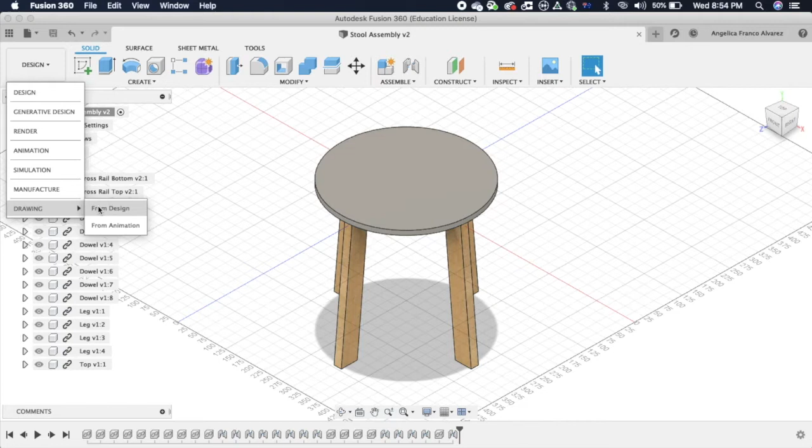So now we're going to generate the orthographic drawing. To do this, we're going to click here on this button that says design. If we click on that, it gives me these different options, and we're going to select the last option, which is drawing from this design.

We're going to do full assembly, and everything else is correct as it is. We're going to click OK. Once we click OK, it generates another empty document, and it will take a little while.

So if it takes a few seconds or up to a minute, don't worry about it. Sometimes this takes a lot of power from your computer. So if you have a lot of applications open when you're working in Fusion, most likely it will be very slow and sluggish. I would recommend to quit all the applications you're using, especially apps like Spotify or social media, and just leave Fusion open so it can take advantage of your computer's full power.

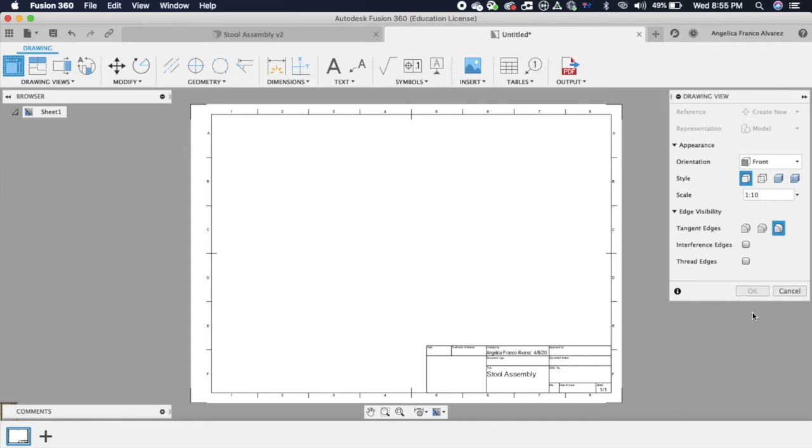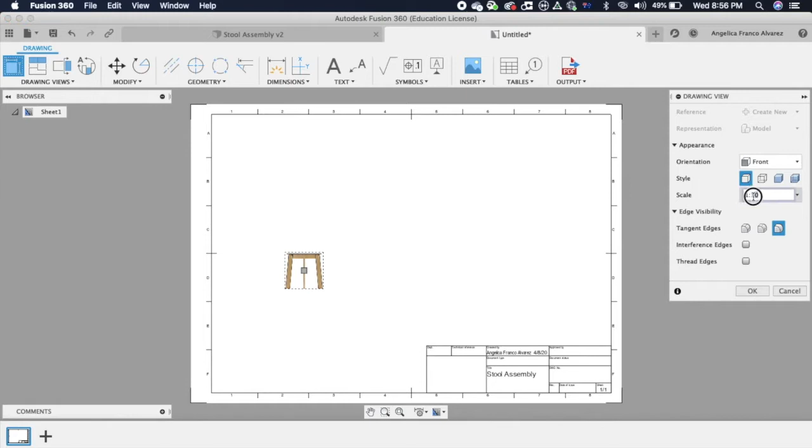So now it has generated the drawing sheet. If we hover inside the drawing sheet, you will see that it has created a little drawing, and that's the base view. So we're going to click on it, and on the right hand side there is this drawing view window, and we can select the scale. That is pretty small. You can explore 1/8, and it's a bit bigger, 1/6. Yeah, I like that size. Then we're going to hit OK.

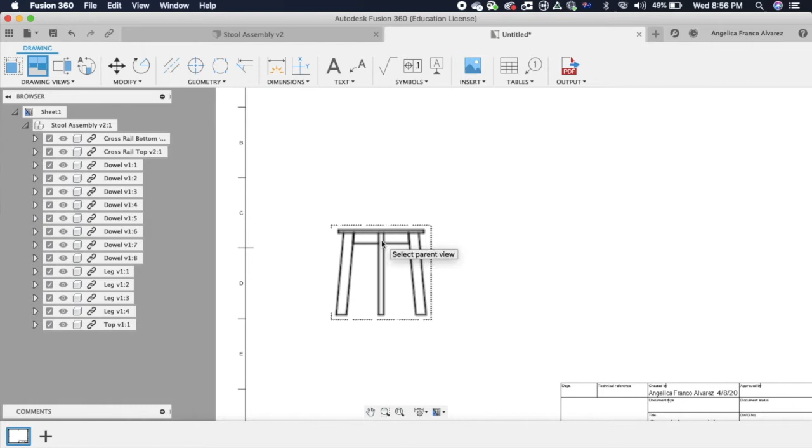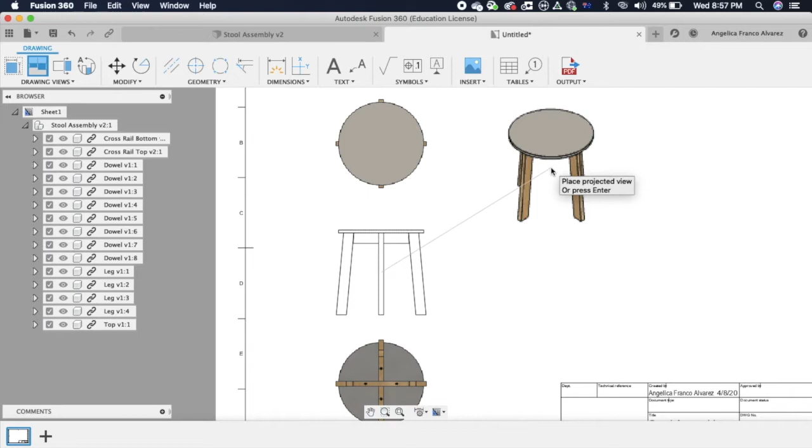Then we're going to do the projected views. Over here there is a shortcut for the projected views, and then we click in the parent view, and then drag out the other views. Click, that generates that view, drag down and click, that generates this other view. I'm not going to place the side view because it's exactly the same as the front view. I'm just going to do isometric and this other isometric from the bottom view, and then escape.

So now I have placed all these drawings. I'm just going to kind of organize a little bit my drawings.

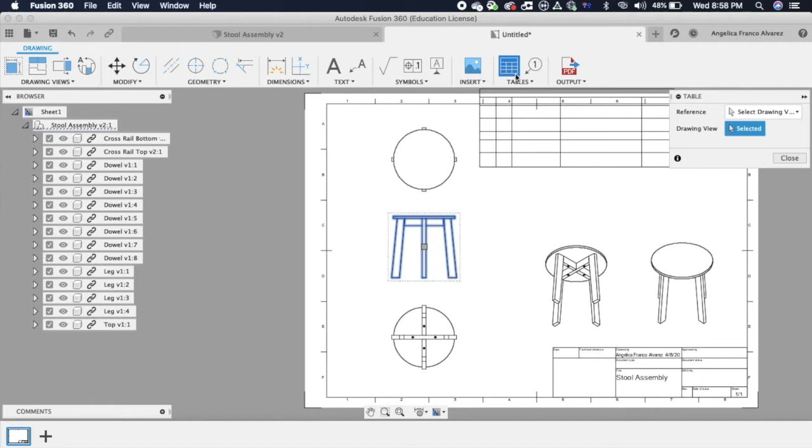Now we need to drop in our bill of materials. This generates a parts list. So if we click on the table, it will automatically generate a parts list. If we pan around, we can find a space and attach it. I like attaching it to this corner. It's a bit more organized, but you can put it down here if you want to, or on the other side, but usually we just put it on this corner.

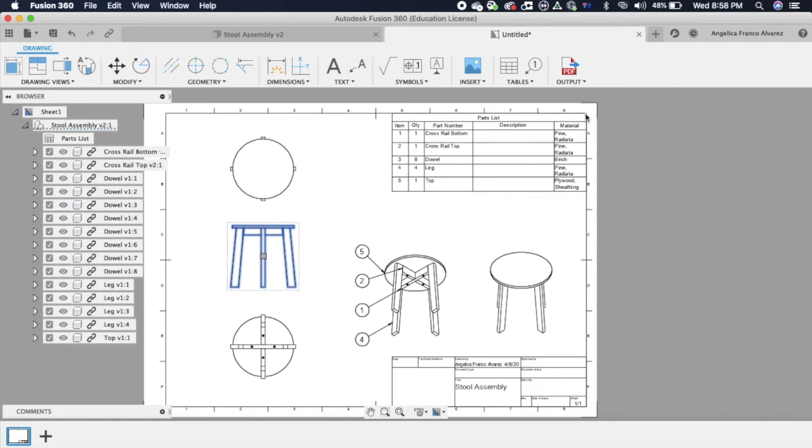You will see that there's text that is wrapping around because the name of the material is quite long, and we can adjust that by clicking on the table and then clicking on these gray boxes, and those gray boxes allow me to move around the width of each column. So that is pretty good now. It's not wrapping, and the table looks more organized. I'm going to just get back there a little bit.

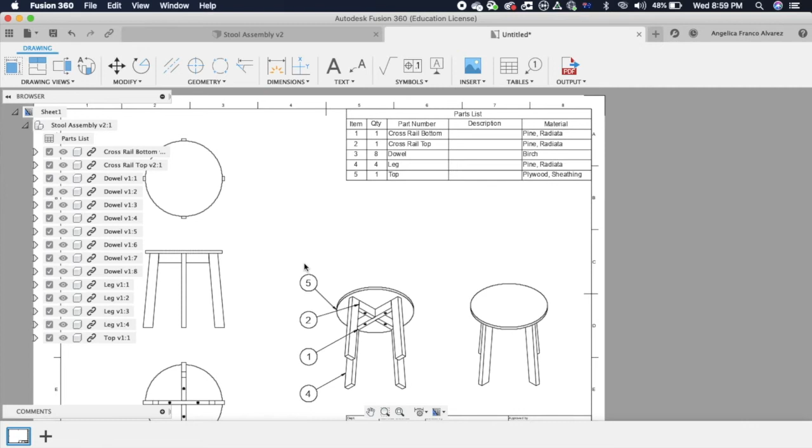There you go. When you generate a table, there is a bunch of little bubbles that are generated pointing out the item. So number 1, your cross rail at the bottom, that's pointing it there. Number 2, 5, 4, and number 3 are the dowels, but you can't see the dowels here because it's hidden.

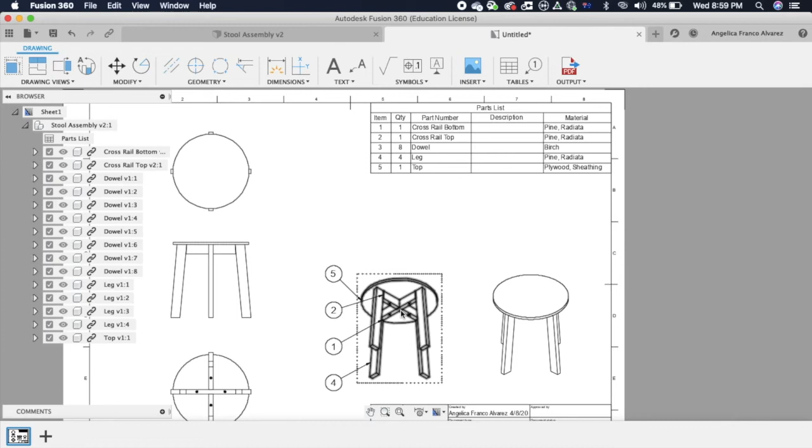So in order to be able to see the dowels, you can double click on the drawing, and then there is shaded with hidden edges. That allows you to see all the internal components. You can close that, and you can do the same for this one here, shaded with hidden edges. That shows you the material color and the hidden edges of the design.

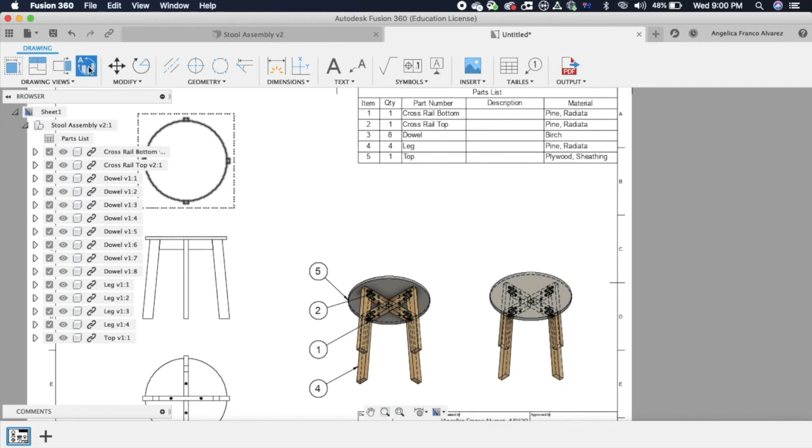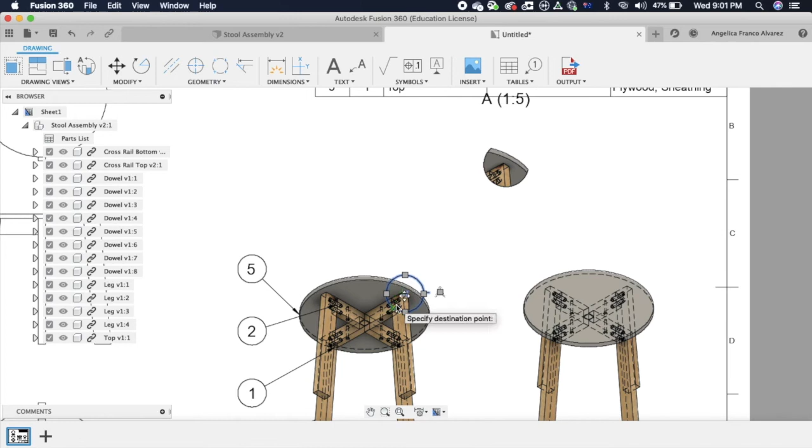If we want to, we can create detail views. There is the shortcut for the detail view here. We click on that and we can bring it in here. So I'm going to select this as my parent view, and then I'm going to click there, click again, and it generates a detail view of that area. I can adjust the area by closing in into a section and moving the center reference of the image. And I can increase also the size of the detail view.

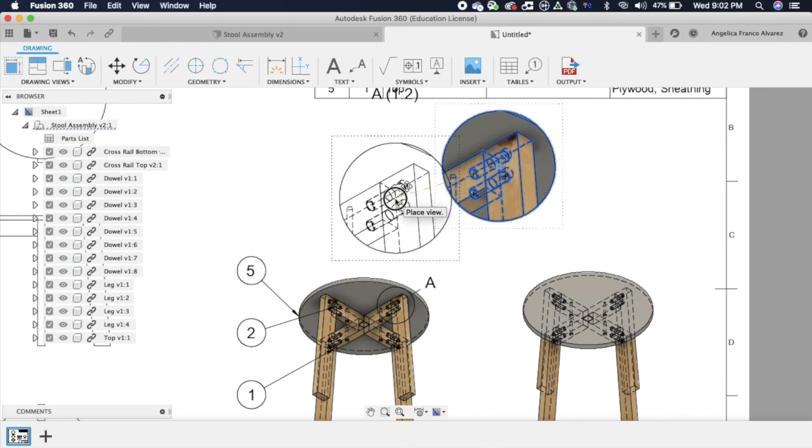I can also reposition the letter. Now if I double click on the appearance of this bubble, I can scale it, and I can scale it further. I can say 1 to 2, so it's a bit bigger, and I can explain better what's happening in there. That allows me to explain and show better the components that I have in there. You can see that the tag for this is a bit far ahead, so I can bring it down by clicking on it, clicking the middle point, and then dragging it down. Once I'm happy with the position, click again.

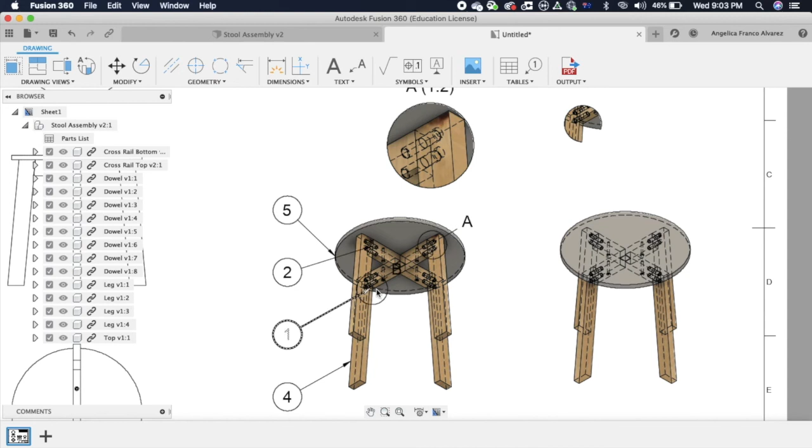I can also do another detail view of the perforations with the countersunk. So I'm going to go back to detail view. I'm going to select this side here and then press OK, and then now I can come in and edit. So I'm just going to bring this in, and I'm going to just move it to where the perforation is. Yep, so it's better visibility.

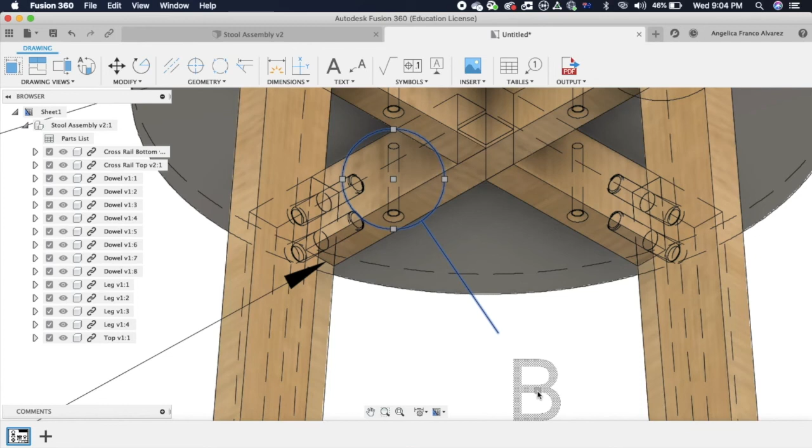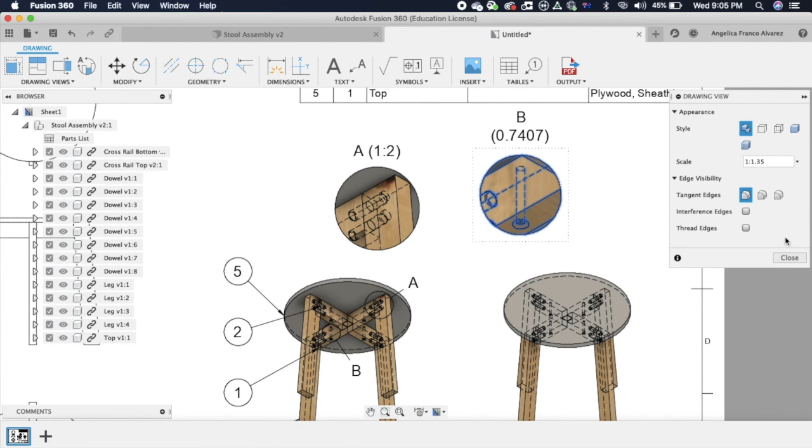And adjust the detail view. Maybe I can do 1 to 1.35. Yep. And now it's time to insert the dimensions.